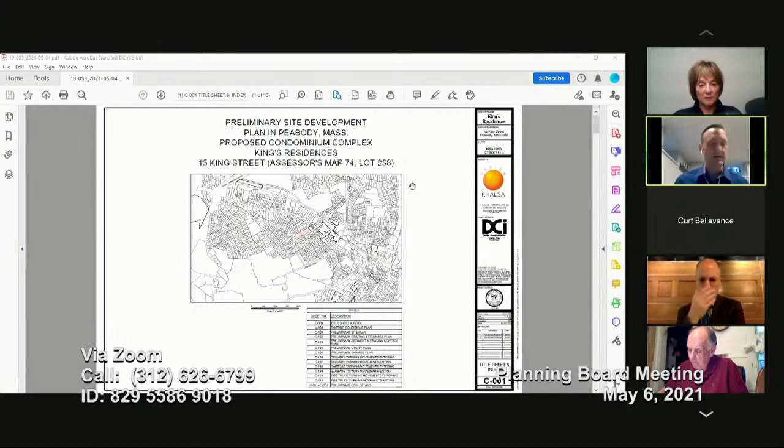Okay, so you should see a drawing that says preliminary site development. Can everyone see that? Okay, perfect. So let me skip through. This is the most recent plan set that included revisions for various comments that were received from the peer reviewers and from DPS.

Let me skip through to the turning movement ones. The only reason I'm skipping through all these is I'm going to come back to these in the PowerPoint and it'll be more clear there. The turning movement ones I didn't want to look at here only because they're a little smaller, and if I just explain one, it'll kind of be obvious to you. So what we did, and please interrupt me if I'm too fast or too slow.

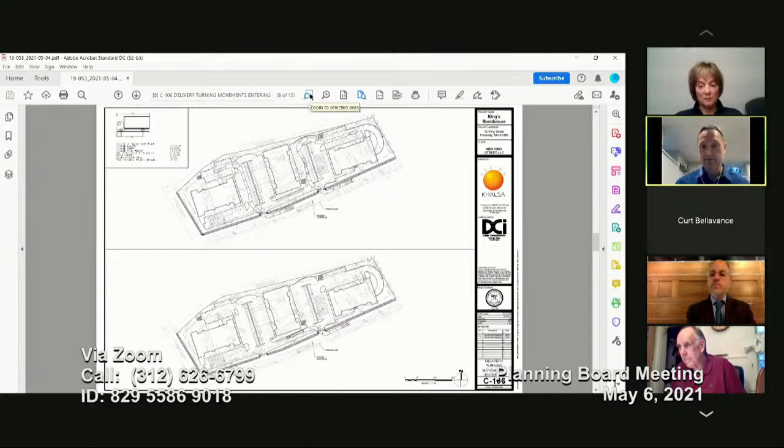We did entering and exit plans for delivery vehicles, in which we used an SU-30, a single unit 30 vehicle, as well as trash pickup. We also did the PFD ladder truck for emergency access in and out. As Jason mentioned, the commercial vehicles, the loading trucks and the garbage trucks, all stay within their designated lane.

So what I'm going to do, I want to zoom in here. I'm just going to talk you through a little piece of this and explain what some of these lines are that you're seeing. On King Street, there's currently parking on the far side of the street from our site. Can you see my little magnifying glass here? This little line I'm kind of tracing over is a 7-foot parking lane - none of this is striped out there, but we drew it in along that entire curb line.

And then with the rest of the pavement between our new curb line and that parking lane, we drew in a dashed roadway center line. Now this center line doesn't exist out there today - there's no striped center line, but we used that as the limit of our vehicles turning in and out of our site. Okay, does that all make sense?

So this movement, if you can follow my magnifying glass, is a loading truck coming in and pulling around up to the front door of this building, building C. This movement over here is the same thing up here to building A. Does that make sense? Okay, perfect.

So I'm going to zoom out a little bit, and I can walk through all these, or we can just walk through a couple if that's fine. This is, again, an entering maneuver into a designated loading area adjacent to building B. Okay.

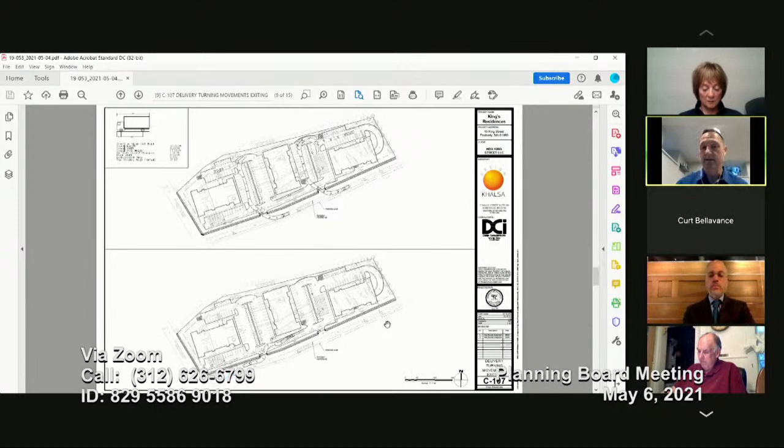This is a similar diagram of where the garbage trucks would enter. Again, this line right here is the center line of the roadway, not including the parking lane. As you can see, the garbage trucks can pull into the dumpster pad locations without crossing those lines and pick up those dumpsters. That's what these maneuvers all show. Is that clear? Am I going too fast?

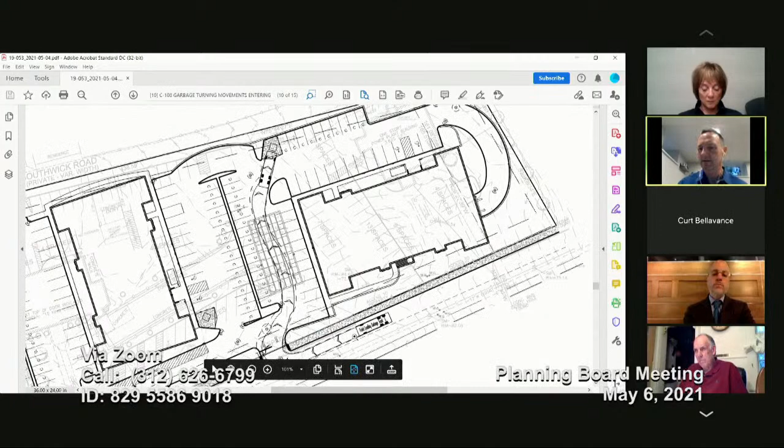And then this one is just those same maneuvers exiting, and obviously the exiting maneuver is easier because they can cross over the lane. They're not restricted to that tight turn in.

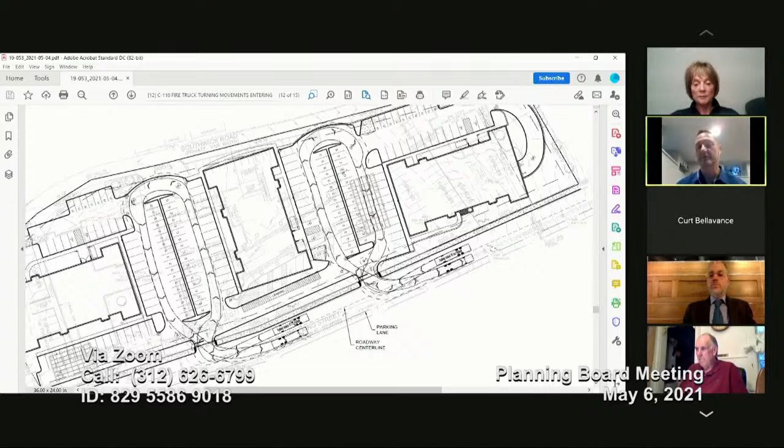And then these last ones, again, these are the ladders circulating around the site. A couple of things that make these ladder movements easier, as well as the commercial vehicles, is our normal drive aisles are 20 feet wide. But what we found was there's kind of a pinch point on these curved areas, as well as at the entrances. So what we did was widen the curved areas up here to 22 feet, as well as widen the entrance width to 24 feet.

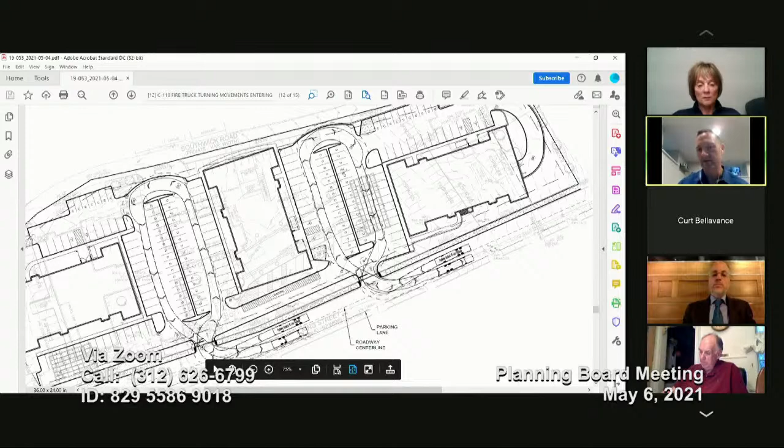So the combination of those two things really helped out, as Jason had mentioned, getting those vehicles from crossing over those center lines. Does all that make sense? Any questions on this? Because I'm going to close this PDF and open up the PowerPoint, if that's okay.

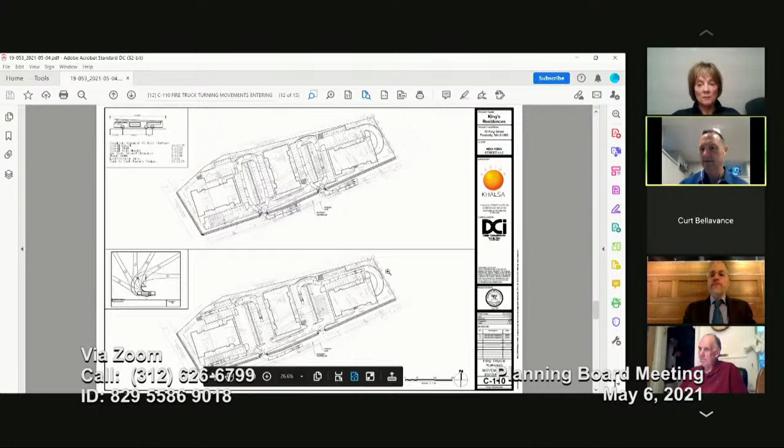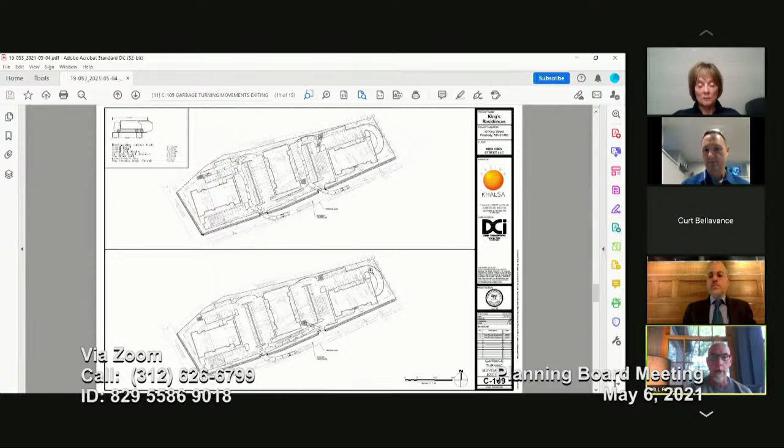Fran, if I may ask a question? Sure. Wayne, can you verify that the trash trucks specifically, and also the delivery trucks, do not need to back out onto King Street to exit the property? Is that correct? Can you go through how the trash truck would pick up that lower dumpster and how he is going to exit back out off the property? Absolutely, yeah. So this is that maneuver.

So you'll recall, I don't want to make people dizzy flipping around, but here's the entering movement for that garbage truck specifically. Pull straight in, it's fully in the site. The property line, it's really hard to see, but it's right under this cursor here. It's right at the back of sidewalk is where the property line is, okay? So the garbage truck pulls up, doesn't cross the center line.

Well, let me explain a couple things on these. You see there's lots of lines where these trucks are turning. The dash line is actually the body overhang part, and the solid line is the wheel travel path. So the solid line can't cross over curbing and things like that, but the dash line can, because it's really just the bumper line. So if you see these dash lines crossing over things, that's okay, it's just a bumper line. So this is the entering maneuver for the garbage truck, pull straight in.

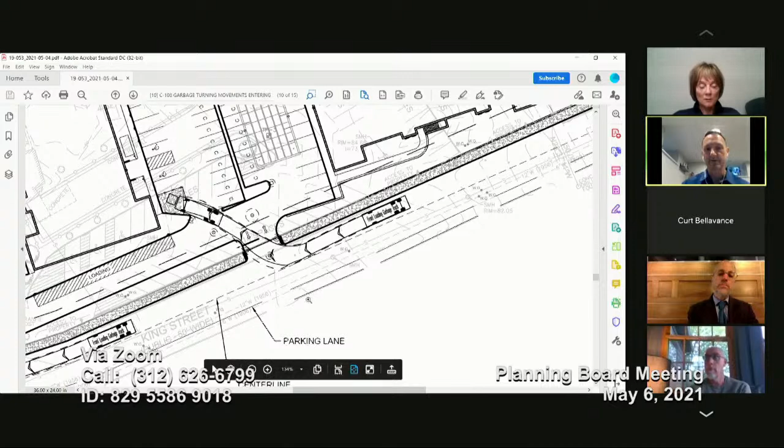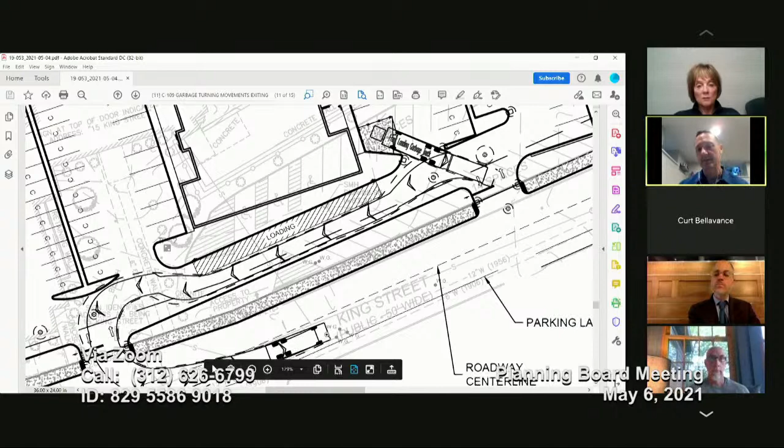This slide shows that exiting maneuver. So this is where it is. It backs out, not into the road, not even across the property line, and then through this kind of loading area, makes this maneuver to pull out. So none of the commercial vehicles, even the larger, none of them need to back out onto the street to get in or out.

Through the chair, if I could, the other exiting patterns, it seems like they all require that the vehicles have to back up, and one of them I think almost like 20 parking spaces of length just to make that turn. Is that correct? They have to back up that whole section of roadway. It is correct, because we had the loading vehicles go to the main entrance of the building, and that's where that main entrance is. Okay. All right. Thank you.

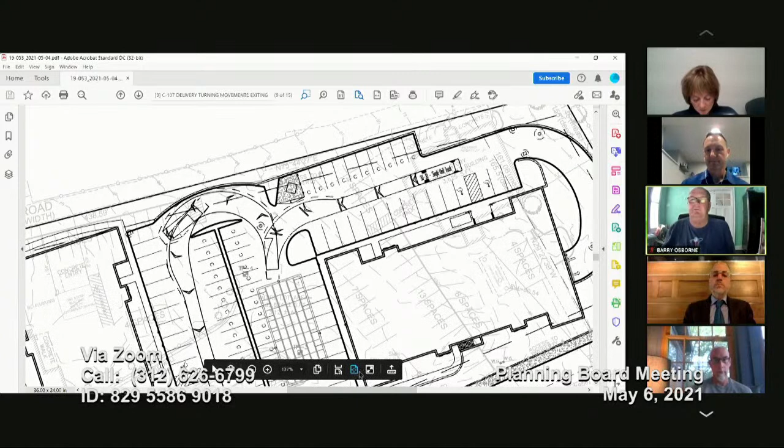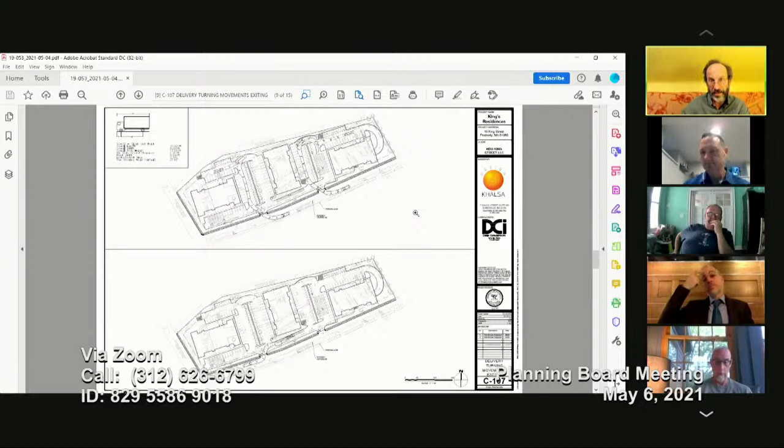Anything else on these, or should I go to the civil part? Can I ask just a question about the ramp at the very far right, is that civil? It's civil. We can talk about that in the civil part.

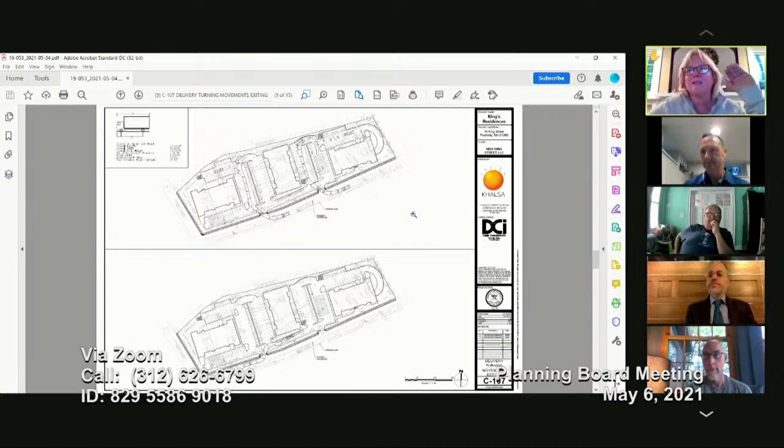This is Janet Bernardo, can I ask a quick question? I'm just wondering with this trash maneuver coming in, if there's any vehicles leaving or queuing to exit the site, is this something that happens off hours? So you're not worried about people leaving the property, because the trash truck has to go through the exit? Is there a concern about that?

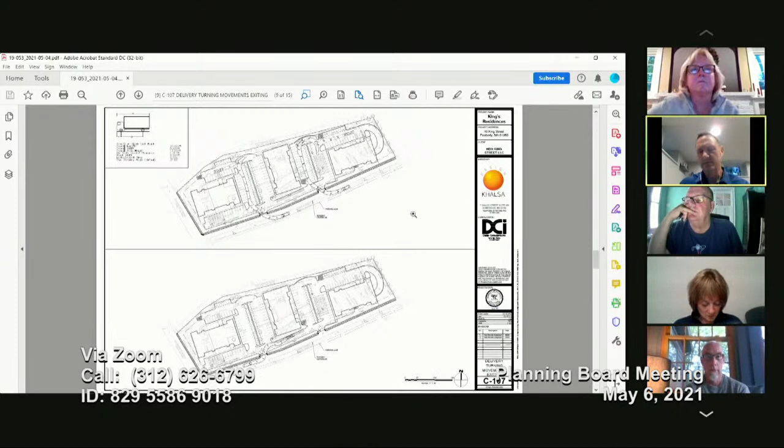I don't think there's a large concern about it. I think we acknowledge that there might be some times when there's vehicles coming in or out where one will need to yield to the other, but that's very common for a development like this, or even an office park, that seems to happen quite a lot. But typically they come in the morning, usually depending on their route, right? The building my office is in happens to be located close to where the trash trucks are stored overnight, so we're one of the first on their route, but it more depends where along the route you are.

I think the intent here, and Jason correct me if I'm wrong, is that this is a private contractor, so there'll be a lot more ability to make their schedule than there might be if it were public. That's exactly right.

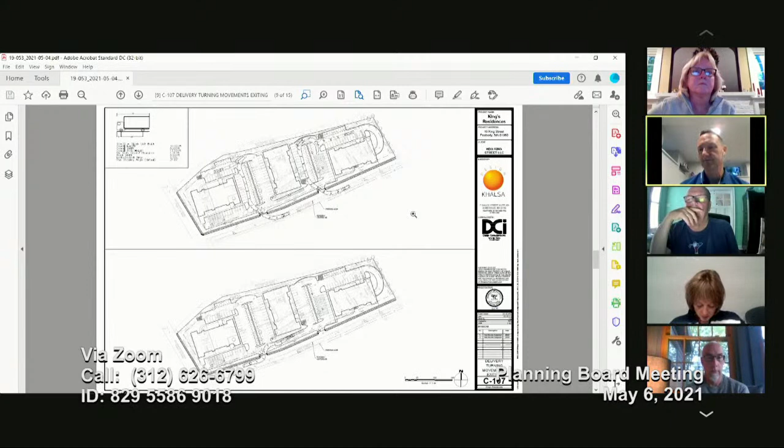My experience with private contracting with trash, commercial delivery, less so the Amazons of the world, is that you can contract for trash collection at a time most convenient for the development. In this case, it would obviously be during off-peak times when people are at work. Hopefully once we are released from the grip of COVID restrictions and people are actually going to work and not working from home, we would make an effort to schedule those trash collections during a time when the parking lot is less filled.

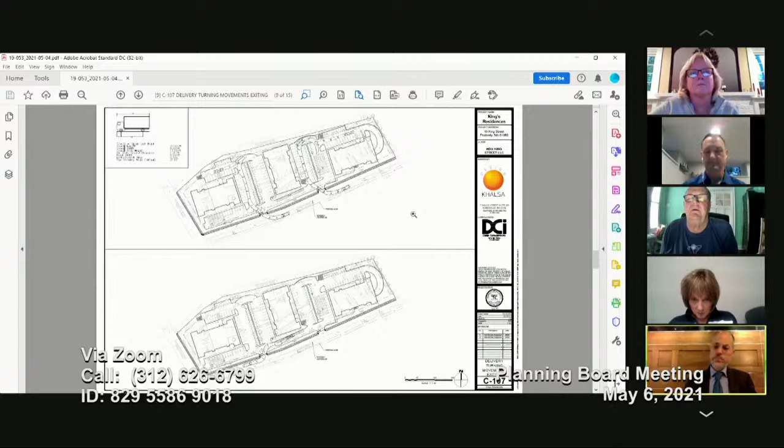If I could, through the chair, to Mr. Keefner, this is all based on one delivery truck per time. What would happen if there was more than one that ends up on that roadway? Is there enough room for them both to back up or get around each other? I'm looking at, if those parking spaces were full, or even if they weren't, with 6 or 7 cars situated in those spaces, would it present a problem if more than one delivery truck was up there at one time and getting out?

I'll tell you, I only have 4 houses on my street, and it seems like I see the Amazon guy or the FedEx, UPS guy quite often. So with the number of units, I'm saying there might be times when there's more than one vehicle trying to use that pattern at once. Is it big enough to do that?

Sure, and so this vehicle we're showing is way bigger than the standard Amazon vans that deliver everywhere. It's a single unit truck, like a huge U-Haul, not a tractor trailer, so it doesn't have a trailer. It's one unit, but the wheelbase on it is 30 feet long. So this might be the type of truck you'd see delivering to restaurants or something like that, it's a large truck. We also have this loading space out here where they could certainly queue if they needed to.

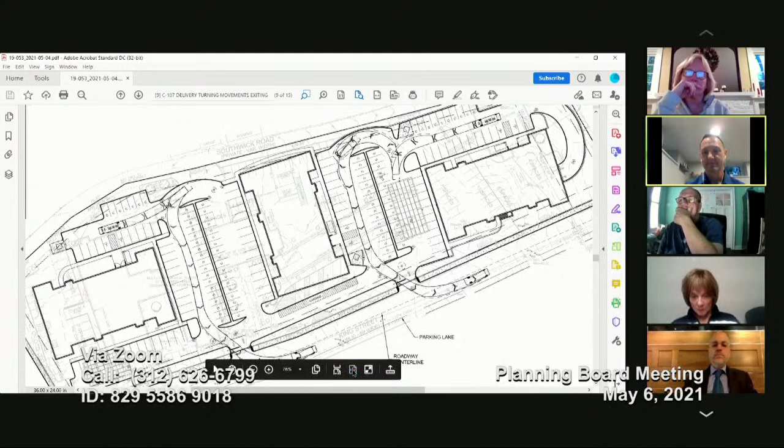Through the chair, if I may, Fran, just for clarification, both trash trucks and delivery trucks can't access the property. If people are queuing to get out of the property, they'll have to sit there on King Street to wait to gain access onto the property while waiting for the residents to leave, and then have someone yield if necessary for them to come in on the property.

I would say that depends where they are. For instance, if this driveway has a queue of folks trying to leave, then sure, the truck obviously can't come into this dumpster.

But if there's a queue here, the truck is actually going back up here, so there's no delay. I would say it depends on the situation.

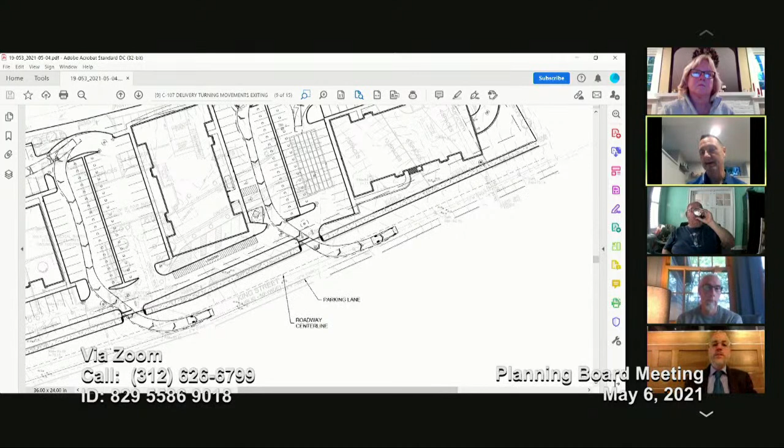I could certainly see situations where that could happen, and that's typical everywhere, at every drive entrance to any development, unless it's signalized. The advantage of having two ingress and egress points is that there are alternatives in the event of that queuing - the truck could drive on past the first point and access through the second.

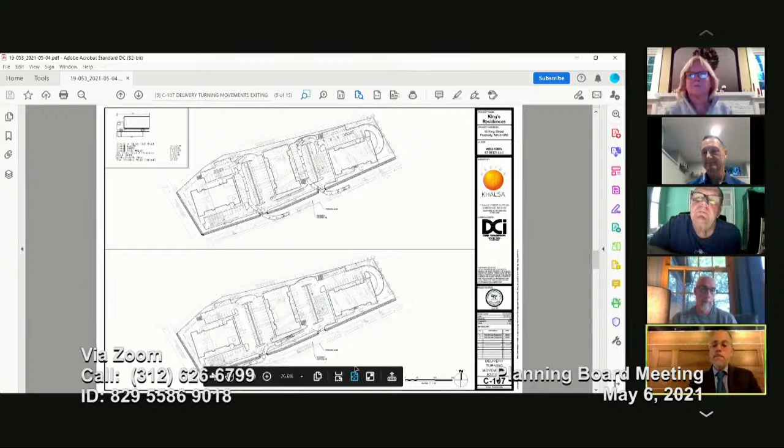Anything further on this, or should we go to the civil portion part? Let's go to the civil.

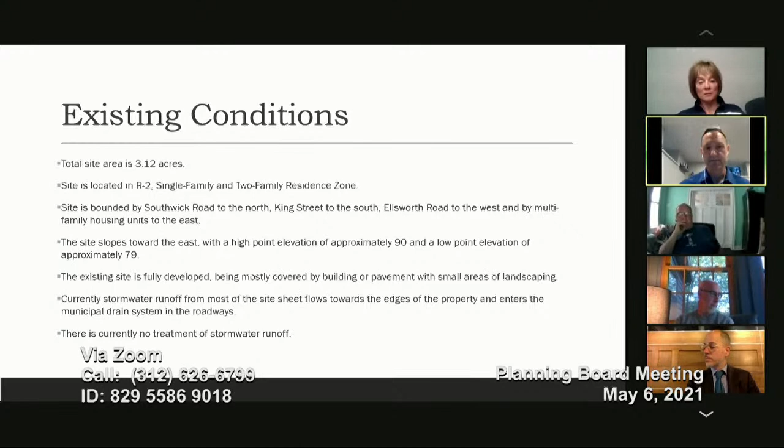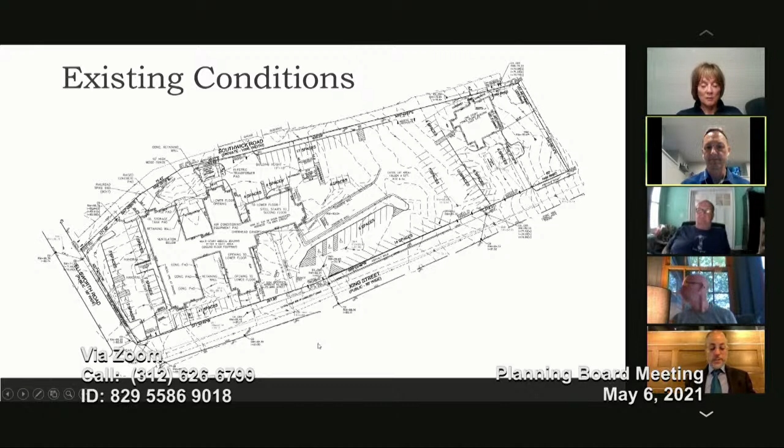So obviously three separate buildings. After one of the first meetings we were at, they were pushed towards King Street, with two drives off the site, like Jason mentioned.

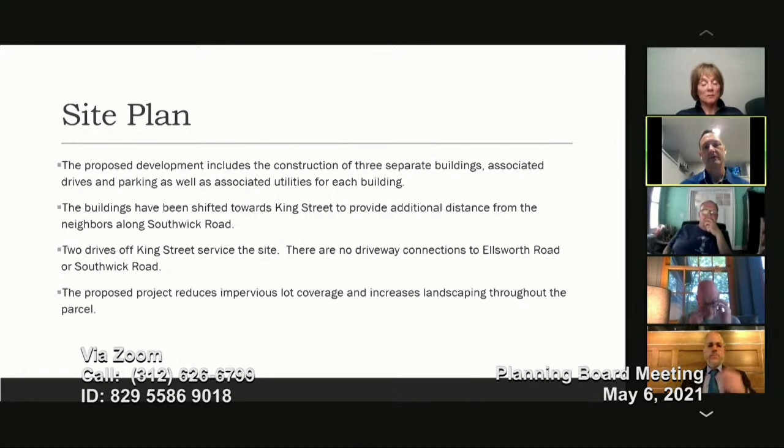This is our current site plan, and we're going to highlight some of the changes we made recently. The 24-foot aisles - I'm sorry, entry drives - these were previously 20, widened to 24. These curved aisles are 22 feet, again they were 20 feet before.

The trash areas were relocated. And just to clarify some of the concerns with the trash areas, all of the trash areas are on our site.

Southwick Road - the actual width of Southwick Road is very narrow. A lot of what is perceived as Southwick Road is actually just pavement that happens to be on our site.

This is the additional sidewalk along Ellsworth that we've agreed to relay. This is that curved drive - it was changed from a straight drive with kind of a 90-degree turn at the top and bottom to a more curved drive. That did a couple things: it saved on those turning movements directly into the garage, and now it's not a 90-degree turn anymore, and it made it a little longer so we could get that slope down just a bit.

Okay, and then we added this loading bay. As Jason mentioned previously, we have some additional signage on a separate sheet - we can go over those if you need it, but we have visitor parking and other things like that. So this is the updated site plan.

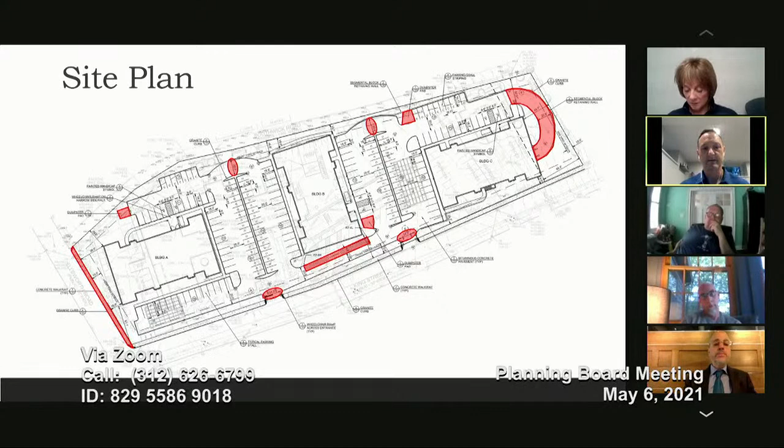Stormwater - we did a couple rounds of testing, one in December 2020, one in February 2021. Those were performed by a licensed soil evaluator in Massachusetts, witnessed by the city. I think we did 7 in total. Groundwater was found to be between 54 and 72 inches. The soils out there are sandy loams, so pretty good sands - they drain pretty well. If I'm going too fast, please slow me down.

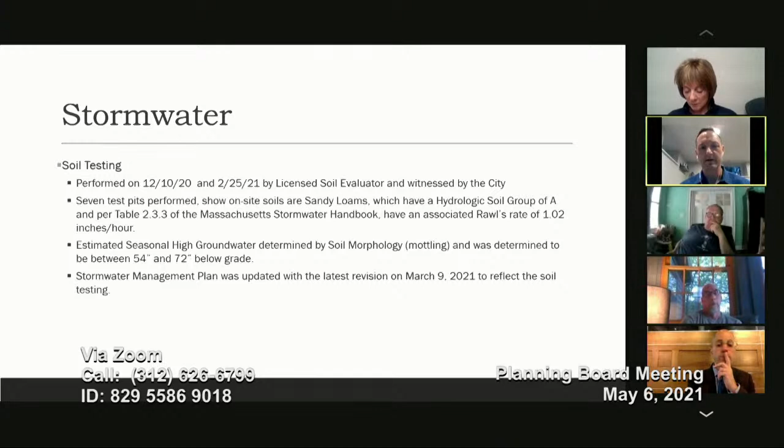Our stormwater decreases runoff and volume for all the storms - 2, 10, 25, 100 year. We decrease the impervious area from existing by over 11,000 square feet. We have improved TSS removal, which is water quality, and we are increasing recharge to groundwater. Stormwater-wise, our site is considered a redevelopment per the stormwater handbook.

As such, there are certain things that we don't need to fully comply with in the regulations. We comply as much as we can, and we need to make things better than they are in the existing condition.

As Jason mentioned, most of the site drains by sheet flow just across the parking areas and then into the roadways. It's untreated. We are proposing to have all of our roof runoff, which is considered clean by the stormwater handbook, tributary to infiltration areas. That's the recharge. That's clean water.

The other site runoff is collected in deep sump hooded catch basins. The deep sumps allow for particulate matter to settle out. The hoods trap floatables in there, usually petroleums. And this provides water quality treatment. Again, this is a betterment over the existing conditions that's out there.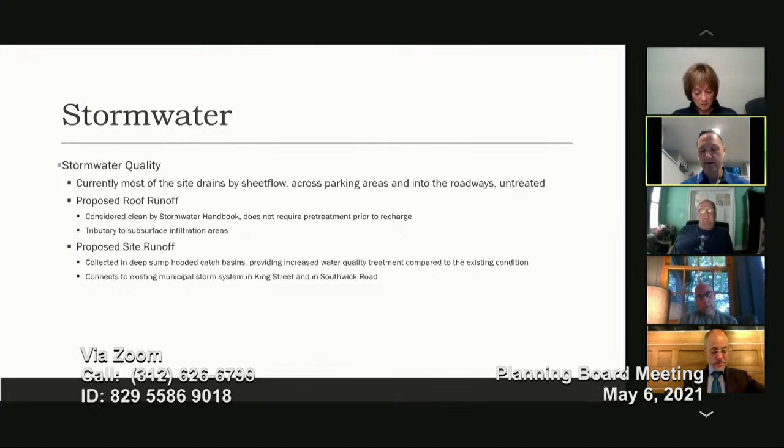We do have connections to the existing municipal storm systems in King Street and Southwick Road. These are just the next, okay, so stormwater wise, I'm just going to glaze over this. We have 3 design points.

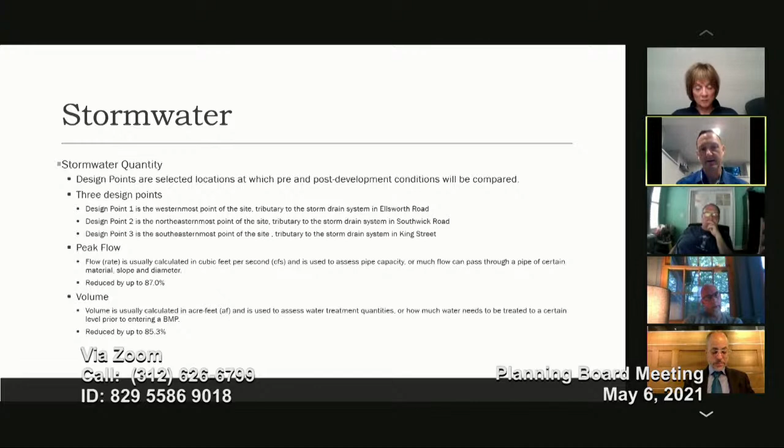Our analysis shows that we are decreasing both peak rate and the volume to each of those design points. The rates vary, and I'll get to a slide that shows that, but for peak flow up to 87% and for volume up to 85%. These are just slides of the tributary areas. If you're not used to seeing that, it probably just looks like red marks, but this is just showing the design points. This is an important slide.

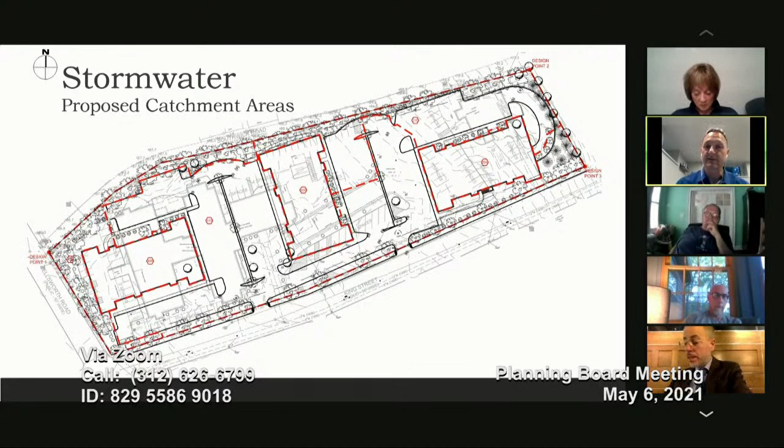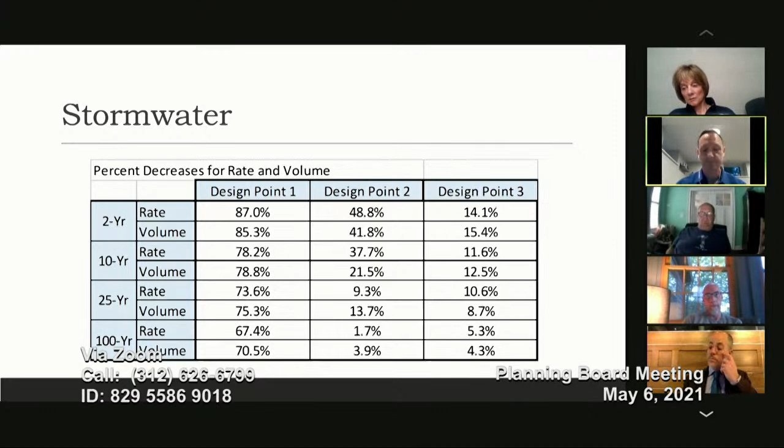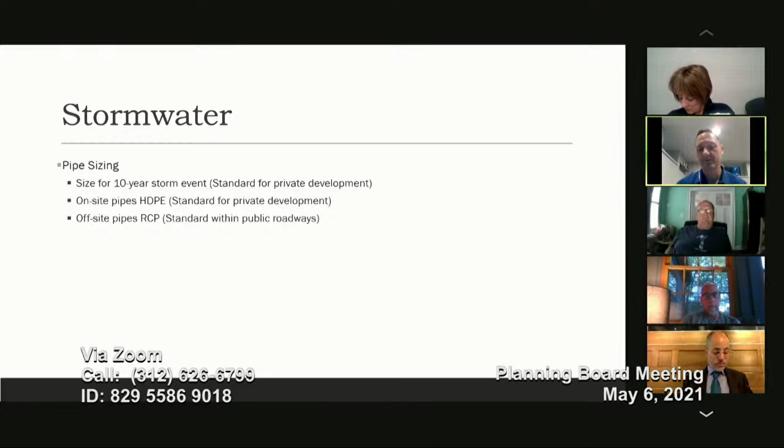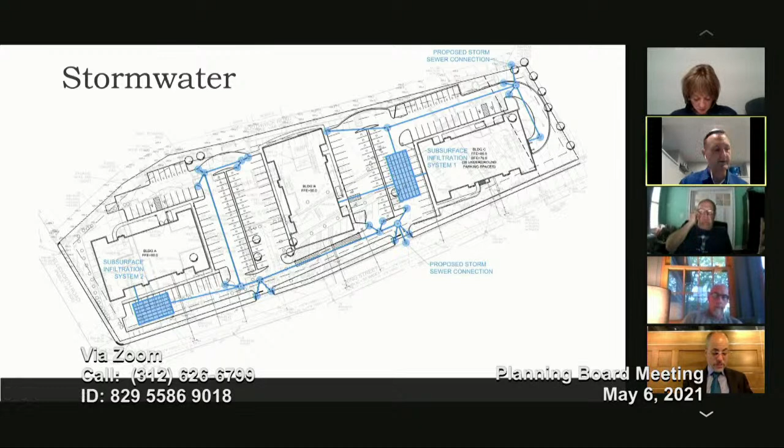This is just a graphic of the systems. There's 2 infiltration systems. System 1 is over here. This takes 2 roofs and a little bit of parking and connects to Southwick. System 2 is over here. This takes building A as well as some parking, and then connects down over here into King Street. We can back over any of these slides if you need to, if I'm going too fast.

In general utilities, we had hydrant flow tests that showed good flows, good pressures. There was a request by DPS. We previously were showing 2 connections for each building, 1 for fire, 1 for domestic. There was a request to make just 1 connection per building and then split those to domestic and fire. We did do that, and those were split inside the site. And I have a graphic that shows that.

The sewers connect directly onto King Street. That capacity probably doesn't mean much to most people, but there's a lot of capacity in King Street for sewer. And that shows it's about a 2.5% increase in that. And as Jason mentioned, pursuant to the Tighe & Bond recommendation, the project is willing to fund those I&I improvements.

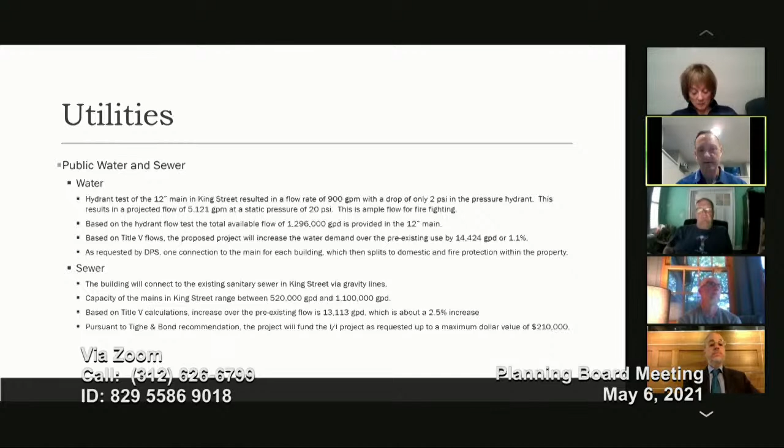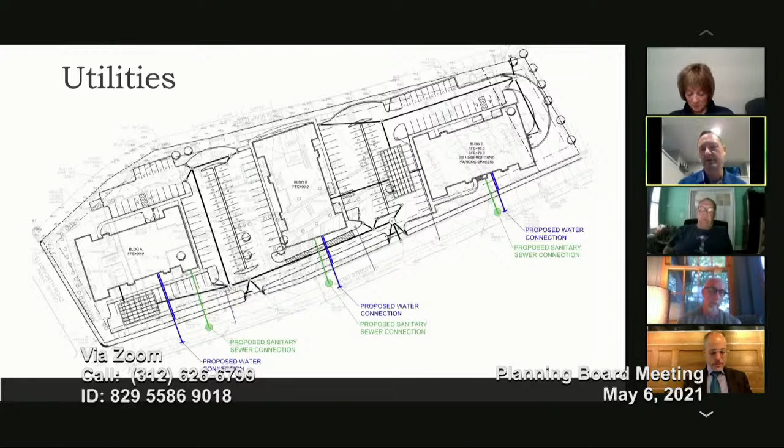Again, we'll coordinate these final hydrant locations with the fire department. We're showing 1 per building. There's code requirements to be within a certain distance of the fire department connection for each building. So I think we have them located in a decent spot, but we can shift them around. It's no problem for us. And with that, that's all I have.

Okay, you can stop sharing if you don't mind.

Okay, so I know that we still need to hear from Will, right? Correct. So does anyone have any questions before we go on to Mr. Pollitt?

Okay, Will, go ahead. Thank you. For the record, William Pollitt, city engineer, city of Peabody.

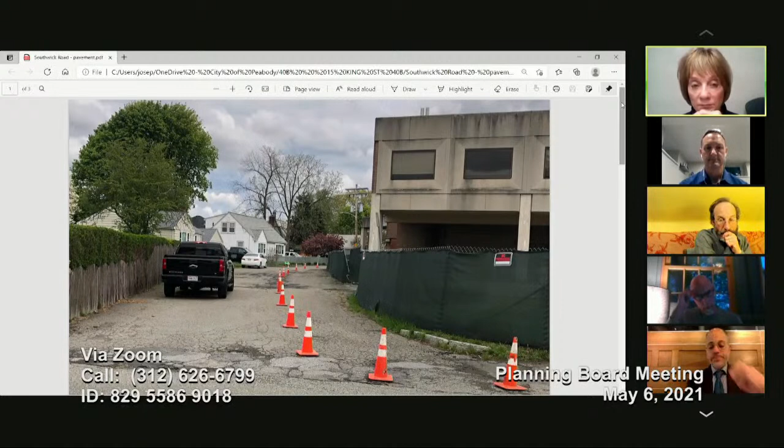If you want to just scroll down, Carla, just to give the board a view - there's that, so that's where Southwick Road will be. And then I think there may be one more picture further down, as it goes down the street. I just wanted to make sure the board was aware that's what their plans propose.

Like I said, that's their property, but that section will no longer be drivable by the public, which, as you can see, there's a fence in that picture.

So for snow removal, it will probably be somewhat problematic in the future, potentially, depending on what the applicant has on their property to dump snow into. So my suggestion would be to make sure the fire department is aware of the new turning radius out at the intersection of Southwick and Ellsworth. I'd recommend the fire department being made aware of that.

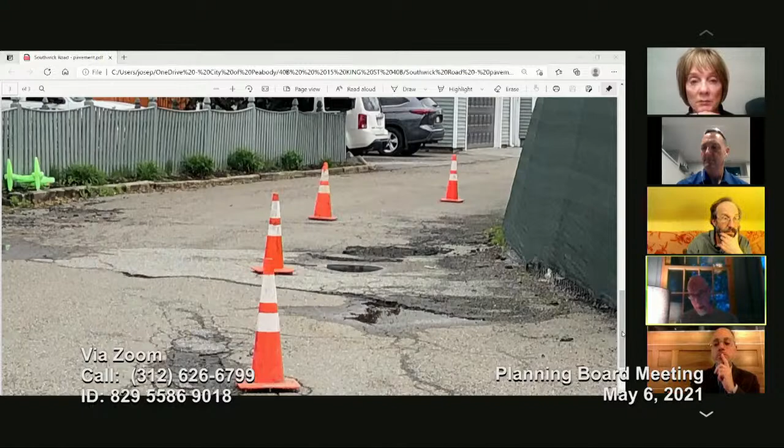The next one I just wanted to quickly talk about was parking. So the applicant is looking to reduce their parking from 310 spots down to 202 spots, which would give them 1.52 spots per unit. I'll let Rod weigh in further, but I don't think we're opposed to the reduction.

But we are opposed to them having the number of compact units in addition to all that. So our recommendation is, if the board is willing to allow them to go down from 310 parking spots to 202 parking spots, that they hold a maximum of 20, or 10%, of their parking to be compact.

And when I say compact, there was a discussion last time about cars being built smaller now than they were in the past. But just to give the board and the public an idea of what compact really is, we're talking Ford Focuses, Honda and Toyota Corollas, Honda Civics, Chevy Cruzes, Nissan Versas, Nissan Sentras, Volkswagen Golfs, Mazda 3s, Volkswagen Jettas, or subcompacts like a Kia Rio, a Honda Fit, a Chevy Spark, a Mini Cooper, a Chevy Bolt, or Chevy Sonic. Those are really what's designed to park in these compact spots.

It's also a recommendation that these parking aisle widths should be increased to 24 feet wide.